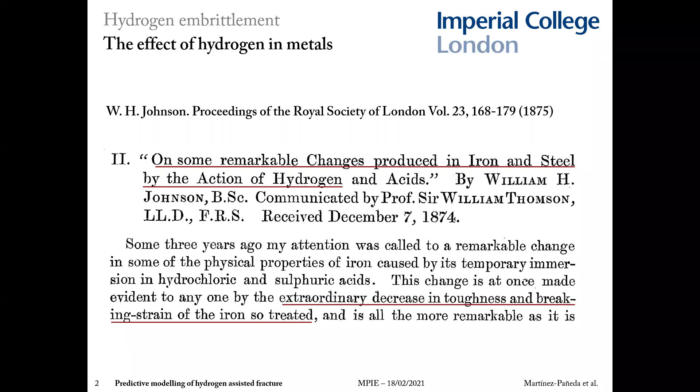So let's get started. First things first, what is this hydrogen embrittlement phenomenon and what is so special about hydrogen metal interactions? We know since more than 100 years ago that metals are very sensitive to the presence of hydrogen. Johnson wrote in 1875 in the Proceedings of the Royal Society about an extraordinary and remarkable decrease in fracture toughness and breaking strain in iron and steel in the presence of hydrogen. In those days, you would very rarely see words such as remarkable or extraordinary in scientific papers. But how hydrogen degrades metals is indeed remarkable and extraordinary.

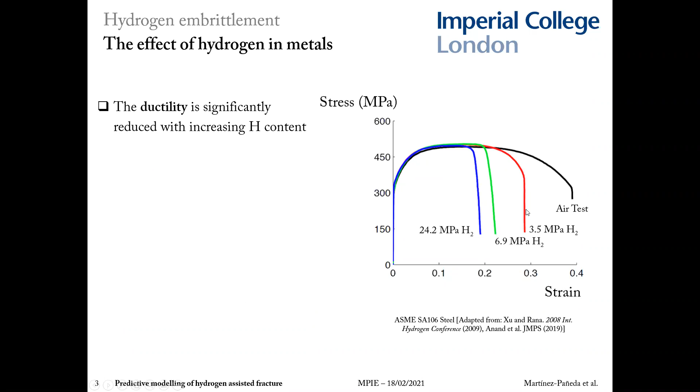One of these effects of hydrogen in metallic materials is how the ductility reduces significantly with increasing the amount of hydrogen. You can see here uniaxial stress strain curves. If we introduce hydrogen into our specimens, for example by exposing them to hydrogen gas, we see a very strong reduction in the failure strain.

This is a very important point to emphasize: the susceptibility to hydrogen damage increases with the strength of the steel. You can see here a plot of fracture toughness versus material strength. This is for a given hydrogen concentration, typical of exposure to seawater. High strength steels yield a fracture toughness that is below 10 megapascals per square root meter, almost like a ceramic.

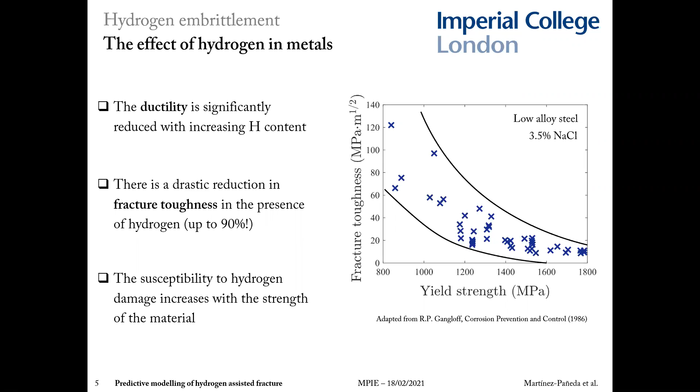This figure has two important implications. One is that hydrogen is effectively compromising decades of metallurgical research. We have developed high performance materials, but we cannot use them. The second is that high strength steels very significantly widen the range of environments where hydrogen is problematic. With these more susceptible modern materials, very little hydrogen content is sufficient to trigger failures in many applications and sectors where we never heard about before.

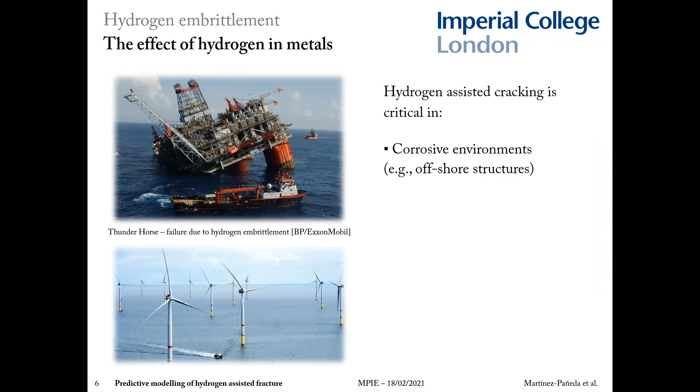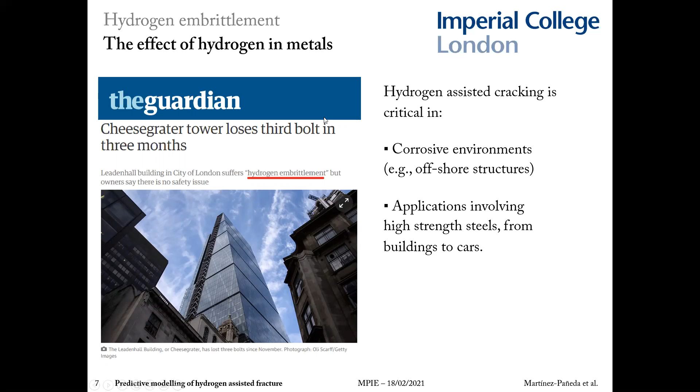Before high strength steels were developed, hydrogen embrittlement was mostly a problem related to aggressive environments, for example those typical of offshore structures in the energy industry. However, high strength steels are very cost effective and we want to use them for our buildings, bridges, railways, cars. This is triggering numerous hydrogen fracture problems across the defense, transport, and construction sectors, in otherwise benign environments. You can see an example in this newspaper article where hydrogen embrittlement is bringing structural integrity problems to one of the most famous skyscrapers in London.

Last but not least, hydrogen could be the solution, or one of the solutions, to our energy crisis. We already have hydrogen fueled cars, trains, and buses in the market. We have a number of these in London. And you can imagine how problematic it's going to be to store and transport hydrogen to power all those vehicles.

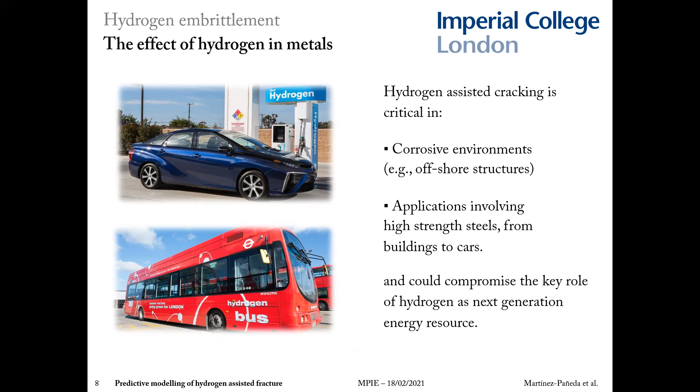Given the magnitude of the problem, you may wonder how it can be that almost 150 years after Johnson's paper in the Proceedings of the Royal Society, the problem is not only unsolved, but hydrogen-related accidents are becoming more and more frequent. One of the reasons is because it is a very challenging phenomenon that crosses the boundaries of mechanics, chemistry, and material science.

We do know some things, of course. We do know that hydrogen atoms enter the material, diffuse through the crystal lattice relatively fast, and are attracted to areas of high hydrostatic stress or high volumetric strains, where the lattice expands and there's more space for the hydrogen to accumulate. But then in that fracture process zone, hydrogen interacts with materials in many different ways and at multiple scales.

So the physical picture is quite complicated. For example, at the atomistic scale, hydrogen can reduce the bonding strength between metal atoms. Hydrogen can also stabilize vacancies. Hydrogen can change the dislocation mobility, and so on.

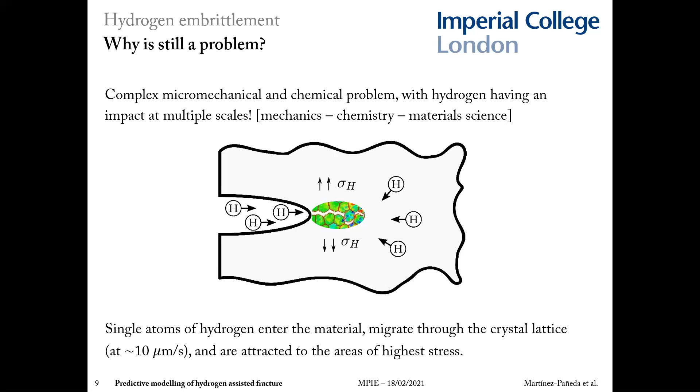This lack of scientific understanding comes at a great cost. Two recent examples are the failure of bolts in the San Francisco Bay Bridge, with a repairing cost of $45 million US, and the cracking of pipelines in the Kashagan oil field with a repairing cost of $3.6 billion US. So this is a massive amount of money.

I think that hydrogen embrittlement is a very beautiful problem because it is scientifically very challenging and very fundamental, but at the same time it has very strong and direct implications for society and engineering practice. As an engineer and a scientist, I find it very rewarding to work on these kinds of problems.

So I aim at tackling this long-standing challenge of developing a predictive model for hydrogen embrittlement, and I divided my efforts roughly into 4 research fronts.

First, it is important to precisely characterize the stresses ahead of the crack. This is relevant not only because brittle failure will occur at a critical stress, but because, as I mentioned before, hydrogen accumulates in areas of high hydrostatic stress.

The second research front involves gaining mechanistic understanding of what hydrogen is doing at the fracture process zone. This is another key step because hydrogen interacts with metals at many different scales and in many different ways. So we will never be able to model a wind turbine atom by atom.

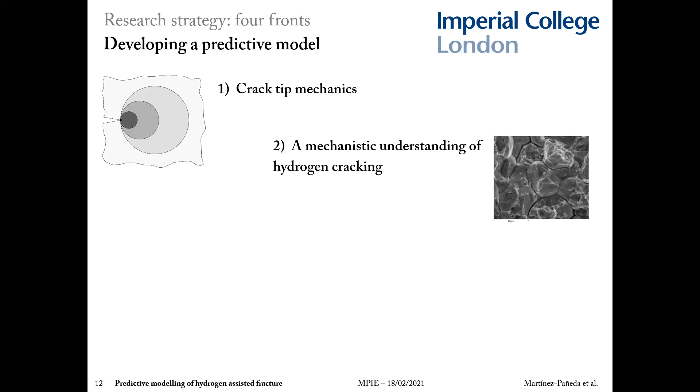And third, of course, we not only want to get the physics right, but we also want to get the chemistry right. We want to know precisely how much hydrogen we have, where, and when.

Last but not least, we want to couple all of those ingredients into a computationally robust framework that not only has the proper physics and chemistry, but also the capability to deliver predictions at scales relevant to engineering practice. I feel this is very important to address on the computational side as well, because I have the personal ambition of enabling virtual testing in the energy sector and in hydrogen-sensitive applications in general.

As you know, virtual testing saves a lot of money these days in the automotive and aerospace industries. They mostly crash cars in computers nowadays. Extending this vision to more challenging areas where the environment compromises the durability of materials requires not only a deeper material science understanding, but also the development of sophisticated computational schemes.

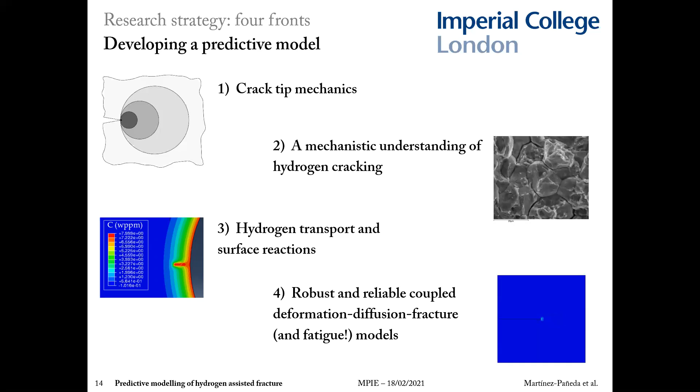So let me elaborate a bit on these 4 research fronts. I'll start first with this key aspect of the importance of resolving properly your crack tip stresses.

The key step here, or I guess in any research problem, is to identify what are the critical variables of your problem. In this case, hydrogen concentration and stresses, and also what is the critical length scale.

There's an obvious trade-off between computational cost and precision. We're still very far away from being able to use discrete dislocations or atomistic approaches to model real components.

But if all the interesting things are happening in the first 3 atoms ahead of your crack tip, then your efficient continuum model is not going to have enough resolution to resolve the physics of the problem. So I guess the question here is, what is the critical length scale for hydrogen embrittlement?

We can determine the critical distance at which cracking occurs by interpreting experiments. Hydrogen-assisted fracture is a little bit like fatigue, in that if you plot the crack velocity versus the applied stress intensity factor, you get this 3-stage region.

A first stage immediately after cracking, where the crack speed grows fast with applied load. A stage 2, where the crack speed is insensitive to the remote load. And finally, the rupture.

The reason why the crack speed is constant in stage 2 is because crack growth is diffusion limited. You have enough mechanical driving force, so to say, but you need to wait for the hydrogen atoms to reach the critical distance ahead of the crack. So cracking is intermittent here, the crack does small jumps as the hydrogen atoms reach the critical distance.

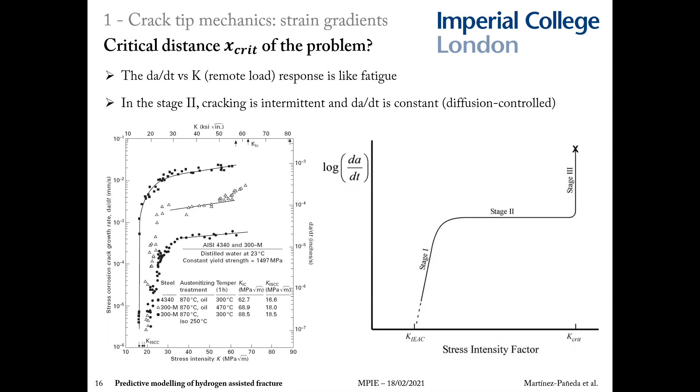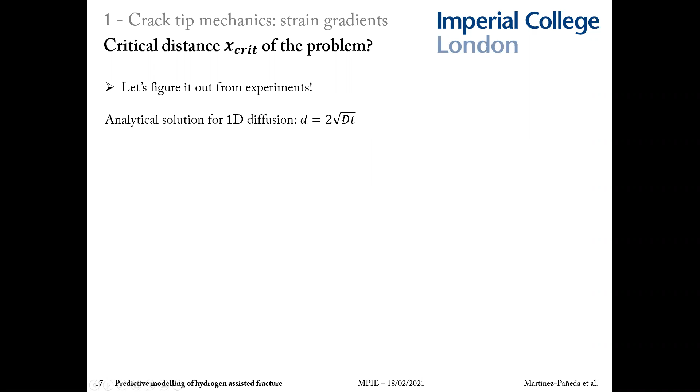Since we know how much time it takes for hydrogen to travel a certain distance, d, for a material with a diffusion coefficient capital D, then we can use experimental data to determine what this critical distance and this critical time is.

So for example, in the case of this nickel superalloy, we can see the stage 2 crack growth. The stage 2 crack growth speed in these three replicate experiments at a potential of minus 1,000 gives us a value of 0.04 microns per second.

Since we know the material diffusion coefficient, which we can measure independently, we can come up with a simple system of two equations: the crack speed and the 1D diffusion analogy. Solving this system, we find that the critical distance equals 1 micrometer. So the hydrogen atoms travel 1 micron ahead of the crack before reaching that critical region.

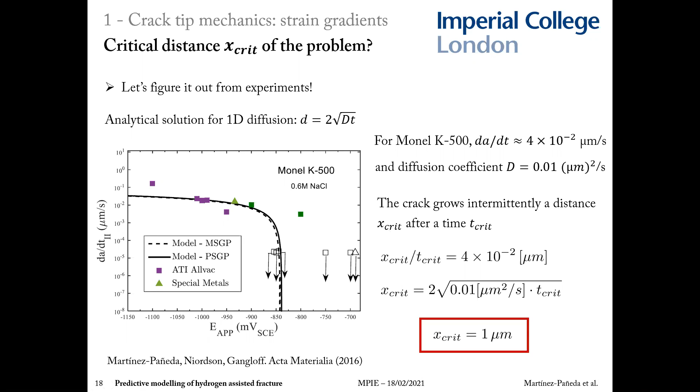So back to the drawing board. What methods do we use? At the microscale, ideally we need discrete dislocation dynamics. But since we want to impact engineering practice, we're constrained to use continuum models.

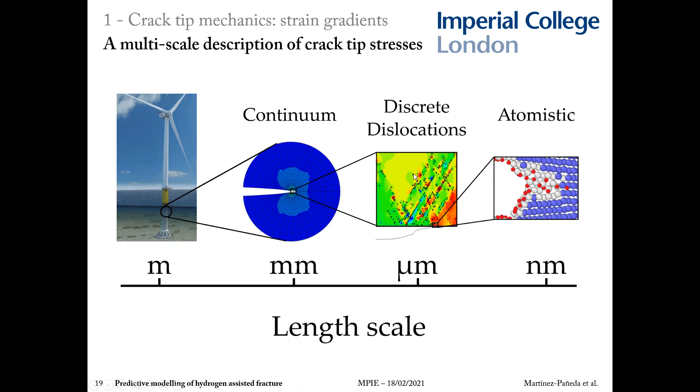So the alternative we've explored is to enrich our continuum models with the physical effects that are missing at the critical distance of the problem. That means we introduce the physics implicitly, by changing the constitutive equations. You can compare what your continuum model predicts a micron ahead of the crack tip with what discrete dislocations predict, and when you see the difference, you can enrich your continuum model.

The main effect you're missing out on at 1 micron ahead of the crack tip is the dislocation hardening mechanism associated with plastic strain gradients. This has been consistently observed in a number of microscale experiments, from indentation to bending, but the ones I like more are the torsion experiments by Fleck and co-workers.

What you see in the slides are experiments done on thin copper wires: torsion on the left and uniaxial tension on the right. You can see that in uniaxial tension, where strains are uniform, the response is roughly the same independent of the size of the wire.

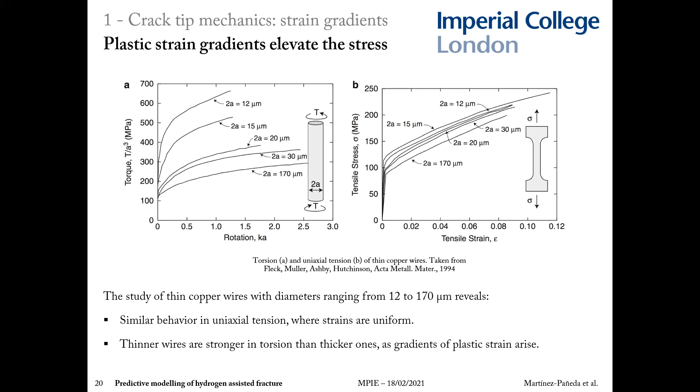The general idea in these formulations is that the plastic work, or the flow strength, is related not only to the plastic strains but also to the plastic strain gradients. In that way, a length scale comes naturally into the model due to dimensional consistency. One can quantitatively capture those dislocation hardening mechanisms that you see when you have large gradients of plastic strain confined into a small volume.

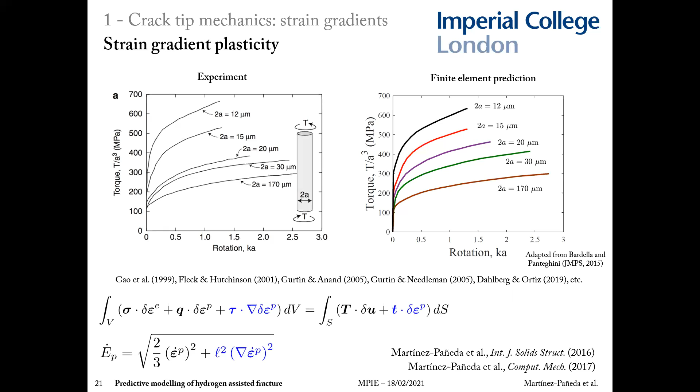But also I've been working mostly on applying these strain gradient theories to gain insight into crack tip mechanics. Because if you have a crack in a specimen, independent of the size of the specimen, you're going to have a plastic zone that is physically small and contains strong spatial gradients of deformation. So you're going to see those local hardening mechanisms that we saw before, the same way you see them in indentation. And today you can measure very precisely GND densities ahead of cracks and inclusions.

What you see when you model crack tip fields with strain gradient plasticity is what's in the slide. Here I'm plotting the tensile stress versus the distance ahead of the crack tip. You can see that far away from the crack tip, both conventional plasticity and strain gradient plasticity agree.

But as you approach the crack tip within tens of microns, strain gradient effects start to play a role, and you get a stress elevation as a consequence of those local hardening and strengthening mechanisms. The differences are quite significant if you look at 1 micron ahead of the crack tip, which is the critical distance for hydrogen embrittlement.

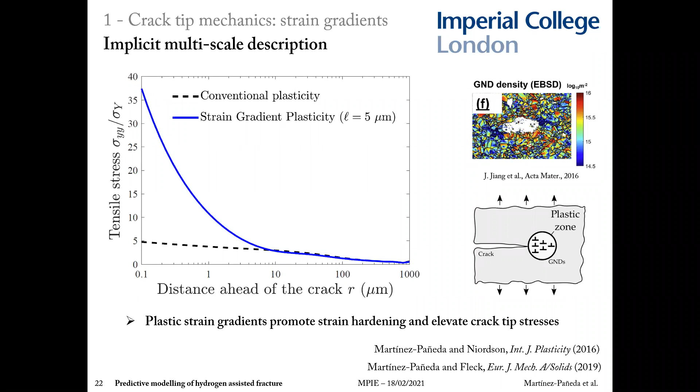Let me remind you that getting these stress levels right is very important, not only because of cohesion or brittle fracture arguments, but also because the higher your hydrostatic stresses are, the more hydrogen will accumulate at that critical distance. In passing, this is what you see when you use discrete dislocation dynamics. This is from Bill Curtin's group, and you can see that fracture is attained at critical cohesive strengths up to 9 times larger than the yield stress.

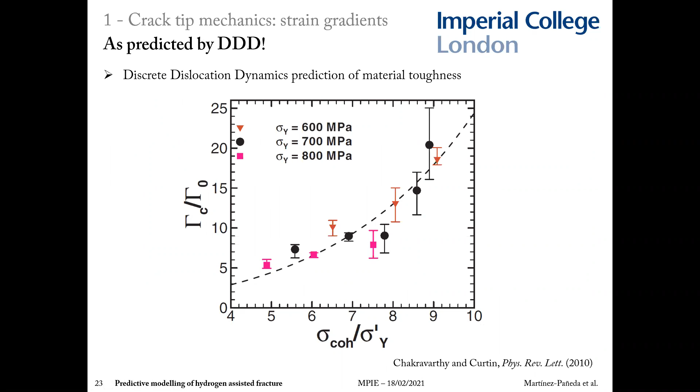This is much higher than the maximum stress levels predicted with conventional plasticity models. This stress elevation has allowed us to not only bring insight to the hydrogen embrittlement problem, but also to rationalize many brittle processes that occur in the presence of plasticity, because the theoretical lattice strength or cleavage strength is on the order of 10 times the yield stress. So you need higher stresses coming from somewhere to rationalize these brittle processes mechanistically.

For example, we had a lot of fun with this approach, looking at fracture of bi-material interfaces, where you can also model dislocation pileup, and also developing statistical frameworks for low temperature cleavage of ferritic materials.

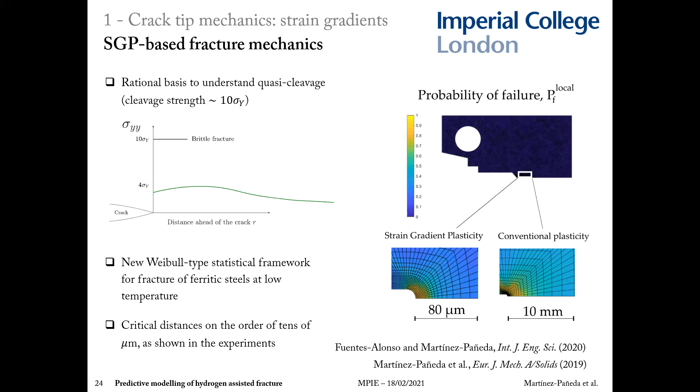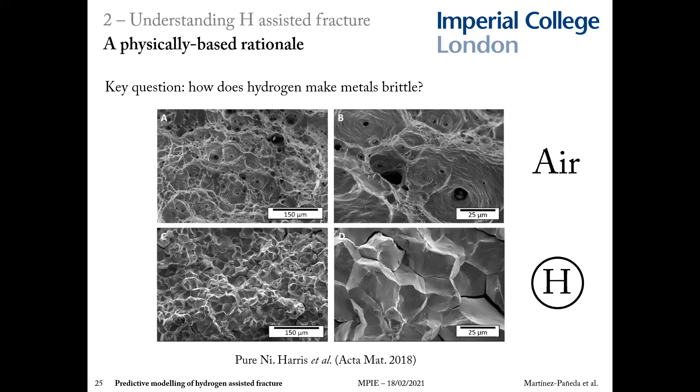But let's go back to the hydrogen problem. This takes me to the second research front, which involves gaining mechanistic understanding into the process. The key question is to understand how hydrogen makes metals fail in a brittle manner, often with the crack propagating along grain boundaries, as you see in that slide. For this purpose, I tried to determine the first order effects behind the ductile to brittle shift we see in the presence of hydrogen. I came to the conclusion that three ingredients are key to developing a mechanistic rationale.

The first is that atomistic calculations show that the bonding strength between metal atoms is reduced with hydrogen occupancy. You can see here a DFT result of surface or fracture energy versus hydrogen occupancy. This is for nickel, and you can see that if we have enough hydrogen, on this side of the graph, the cleavage strength or grain boundary strength will be much weaker.

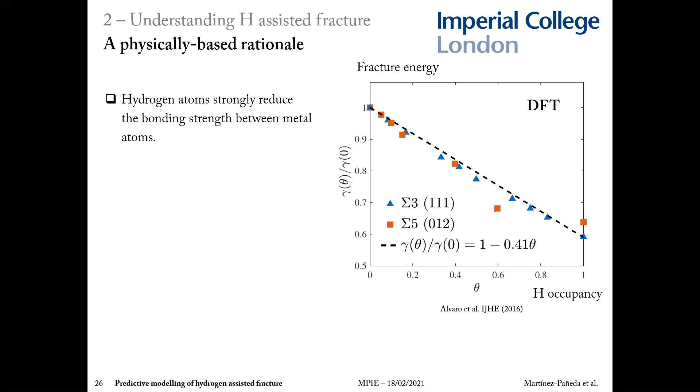There has been a bit of discussion in the atomistic community regarding quantifying how strong this effect is, and a big part of the controversy relates to figuring out how much hydrogen you actually have. So where are you on this x-axis, this hydrogen occupancy? That is the next research question. So where are we on this hydrogen occupancy axis? How full of hydrogen, for example, are our grain boundaries?

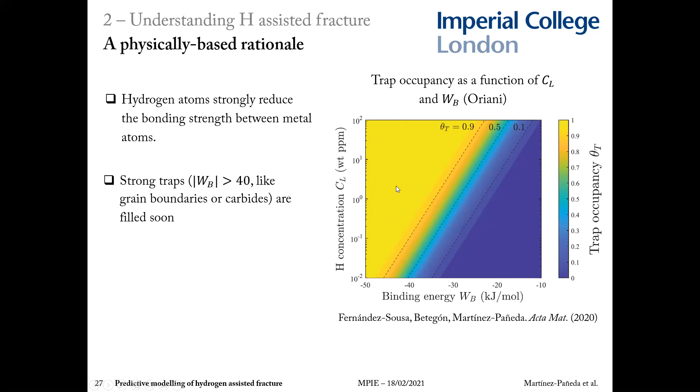The answer comes from well-established mass diffusion laws, specifically Oriani's equilibrium. You can relate the hydrogen concentration in the crystal lattice, the y-axis here, with the occupancy of a trap, theta t, as a function of the binding energy of the trap. What we learn is that strong traps, such as grain boundaries, with an absolute binding energy of 40 kilojoules per mole or higher, will be essentially full for hydrogen concentrations as low as 0.3 ppm. So if you look at this graph, as long as you reach any meaningful value of the lattice hydrogen concentration, you get full occupancy of the trap, or almost full occupancy. This is what you see in experiments.

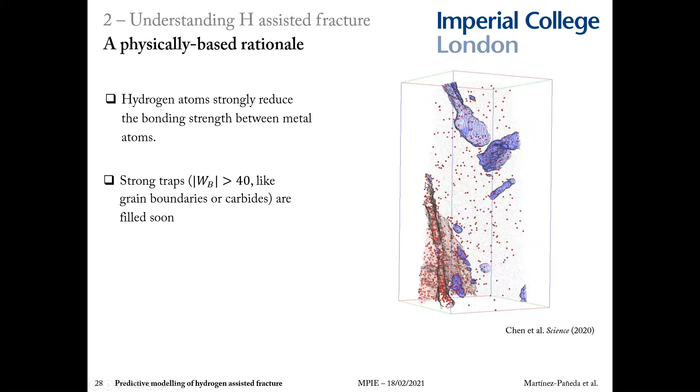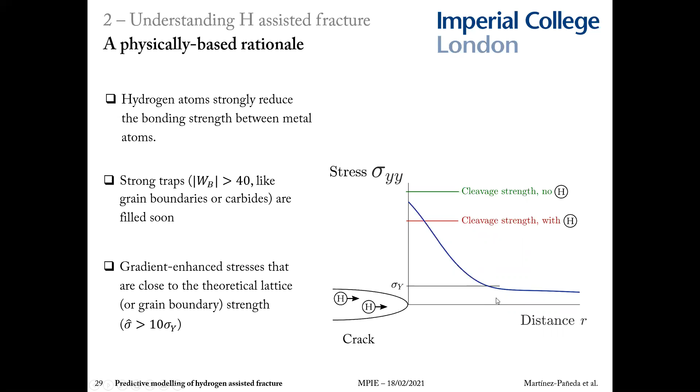When you properly consider the stress level near the crack tip, you see that the drop in cleavage strength is sufficient to trigger brittle fracture. In other words, when you combine the fact that hydrogen will drop the cleavage strength by, say, 20%, with the fact that your stresses at the critical distance are close to the cleavage strength, maybe 10 times the yield stress as we saw in the DDD simulations, you end up with a mechanistic model that can predict the ductile to brittle shift as a natural byproduct of the simulation, without any ad hoc criteria or fitting parameters. You don't have stresses or energy big enough to hit the cleavage strength, but the moment hydrogen comes into the picture, you are able to naturally predict that. I will show this later.

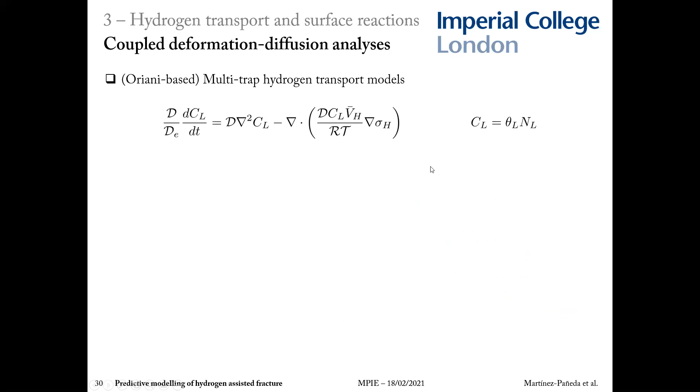So let me jump to the third research front, the chemistry. Hydrogen diffusion is normally characterized using an extended version of Fick's law, as you see in the slide. Note the important role of the hydrostatic stress, as I mentioned before, so there's a strong coupling with the mechanics. One thing we have been working on is the development of multi-trap models, as hydrogen atoms can be trapped at microstructural features such as grain boundaries, dislocations, and carbides, and this affects diffusion. So it's something you may want to incorporate in your modeling depending on what you're looking at.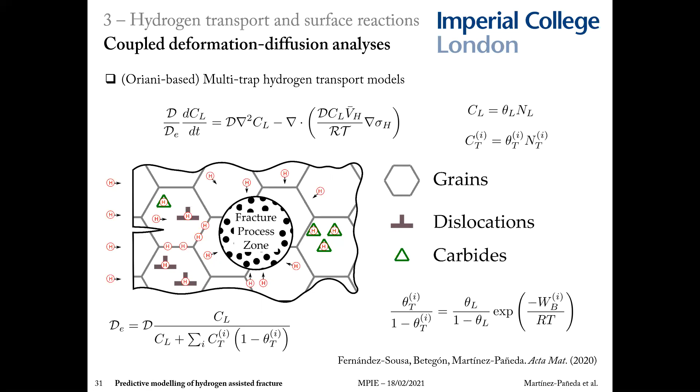Another important aspect that has to be addressed to properly quantify hydrogen is to adequately characterize hydrogen ingress into the metal. This is not complicated for gaseous environments—one can just make use of Sievert's law—but in aqueous environments, the physical picture is more complicated.

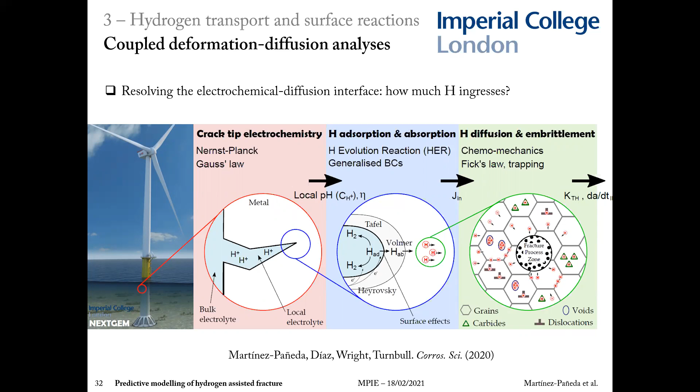What I've been working on with Alan Turnbull is developing generalized boundary conditions that can resolve the electrochemistry-diffusion interface. I won't elaborate much more for the sake of time, but what I can say is that using these rigorous formulations, we learned that the usual procedure of prescribing a constant hydrogen concentration can be very inaccurate. So it's worth taking that into consideration.

I think this is a key aspect of the modeling that sometimes has been overlooked, maybe because we are more familiar with the mechanics side of it rather than the electrochemistry. But we need to take into account that almost every chemomechanical fracture model for hydrogen out there is very sensitive to hydrogen ingress—the input to the model, which is the hydrogen concentration. So we need to be able to properly figure out how much hydrogen is actually coming in.

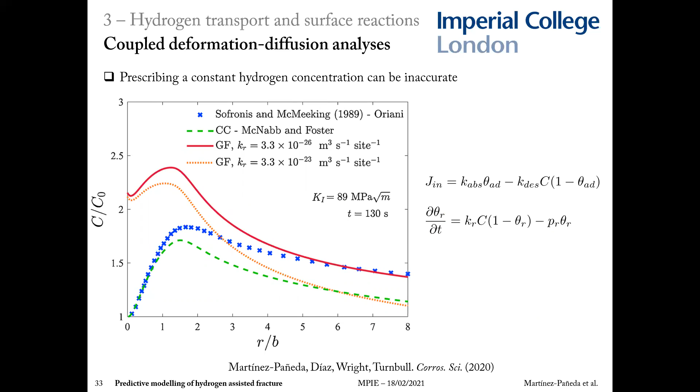One more thing on the diffusion side before I move to the fracture process: remember that mechanics plays a key role. There's a hydrostatic stress term here, and in fact, for the steady state case, this is the closed form solution for the lattice hydrogen concentration. You can see there's an exponential dependence on the hydrostatic stress, which is why it's so important to enrich continuum models to be able to accurately quantify crack tip stresses.

As you can see in the slide, experimental measurements of hydrogen concentration ahead of the crack tip agree better with predictions from strain gradient plasticity and show two effects. First, hydrogen content increases with the remote load, which is only captured with strain gradient plasticity. Second, hydrogen content increases as we approach the crack tip, which again you can only capture if you enrich your continuum model.

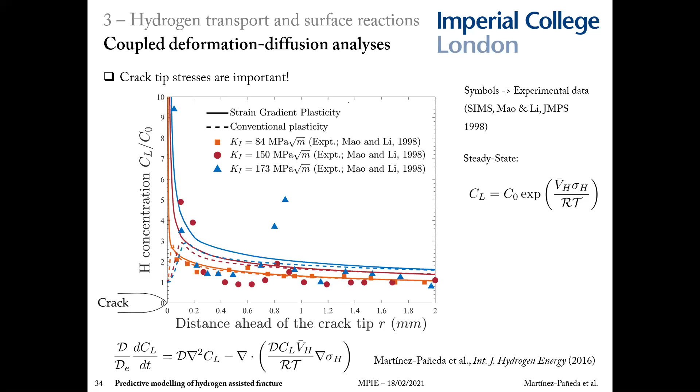That takes me to the fourth and last research front, which has to do with the development of compelling multiphysics computational tools. Myself, I have used a variety of computational fracture mechanics approaches in the past, like XFEM or cohesive zone models.

But not so long ago, I came across the phase field fracture method, and I cannot speak more highly about it. The idea of these phase field methods is to use an auxiliary variable to track the evolution of interface boundaries, which is a well-known mathematical and computational challenge.

With the phase field paradigm, we follow the interfaces implicitly, in the sense that we no longer have a sharp interface, but the auxiliary variable, the so-called phase field or phase field order parameter, tells us where the interface lies. The method was first developed in the microstructural evolution community, where the change in shape and size of microstructural features, such as grains, can be predicted by defining the evolution of the phase field in terms of other fields, such as temperature, through a thermodynamic free energy.

In fracture mechanics, the phase field tracks the crack-solid interface, taking, for example, a value of 1 in the crack phase and 0 in the undamaged material points, varying smoothly in between. The temporal evolution of the phase field is then described by a differential equation that can be easily solved using standard numerical methods, making the tracking of evolving interfaces computationally tractable.

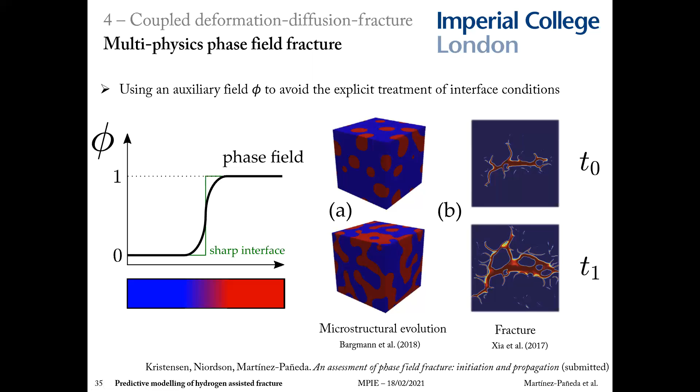You can see in the slide how complex cracking morphologies can be captured, such as crack merging, nucleation from arbitrary sites, and branching. So it's a very powerful tool from a computational perspective.

At this point, you might say, okay, all good on the computational side, no issues dealing with evolving interfaces such as cracks. But when do those cracks propagate? In other words, what differential equation do you use to evolve the phase field? Well, one of the nice things about phase field models is that they provide a computational framework for Griffith's energy balance.

Those of you familiar with fracture mechanics will remember that Griffith, one of the fathers of the field, postulated that a crack will grow if the energy released by the solid reaches a critical value, the so-called critical energy release rate or material toughness. This energy balance results from considering, in a thermodynamics context, the work required to create two surfaces.

One can formulate Griffith's energy balance in a variational form with a term accounting for the stored elastic energy in the solid, as given by the strain state, and a second term characterizing the fracture energy, the energy dissipated by the formation of a crack.

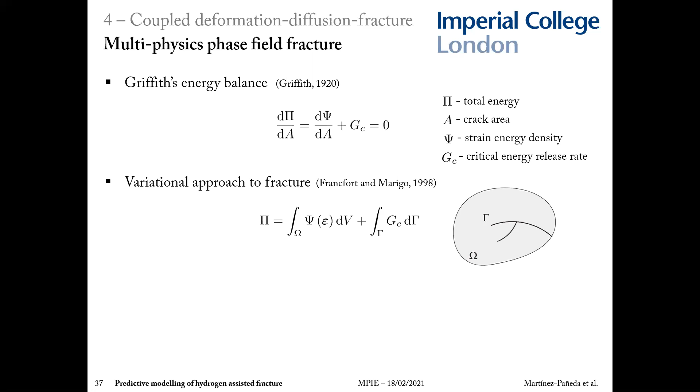Therefore, crack nucleation and growth can be predicted naturally without ad hoc criteria, as dictated by the minimization of this energy conservation statement. However, minimization of this Griffith functional is hindered by the fact that the crack surface gamma is unknown. But here is where phase field comes to our rescue, because one can use the phase field as a marker, transforming the surface integral into a volume integral and enabling us to solve this global minimality problem.

There are two things I want to emphasize here. First, following standard continuum damage mechanics arguments, the phase field can be thought of as a damage variable that goes from 0 to 1 - 0 in intact material, 1 in fully cracked material points. As a consequence, increasing this value reduces the stiffness of the solid, as you can see here in the first integral.

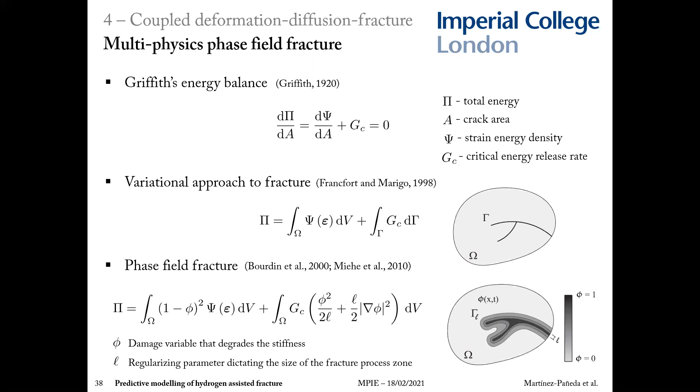Secondly, there is a gradient term and consequently a length scale, so the model is non-local, which ensures mesh objectivity. Results are mesh independent as long as you resolve this phase field length scale. So at the end of the day, we have a model that is physically sound, based on Griffith and the thermodynamics of fracture, and at the same time computationally very compelling.

You can get a good overview of the model by looking at the balance equations. The first equation is the solution to the deformation problem, the standard balance of linear momentum, with the phase field degrading the stiffness of the solid, which increases with mechanical straining.

The second equation is the phase field evolution, a competition between the toughness of the material, a constant material property, and the strain energy density, the energy stored in the solid. Just by solving this simple system, we can predict in both 2D and 3D very complex cracking patterns, such as branching, merging, initiation from arbitrary sites, complex trajectories, and without convergence issues or the need for remeshing.

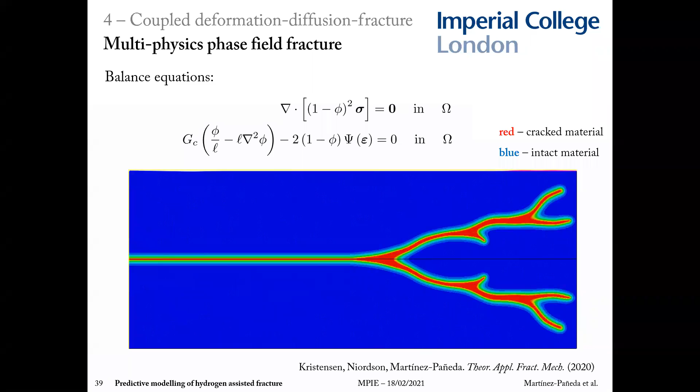We have had quite a lot of fun with it and contributed to the phase field scientific community by presenting new solution schemes and by using new phase field formulations for fracture and fatigue, and developing new phase field formulations for fracture and fatigue in functionally graded materials, in shape memory alloys, and also in fiber reinforced composites.

It has been a great experience, to be honest, working with this method. Results are mesh independent, the method is easy to implement, and there are no convergence problems.

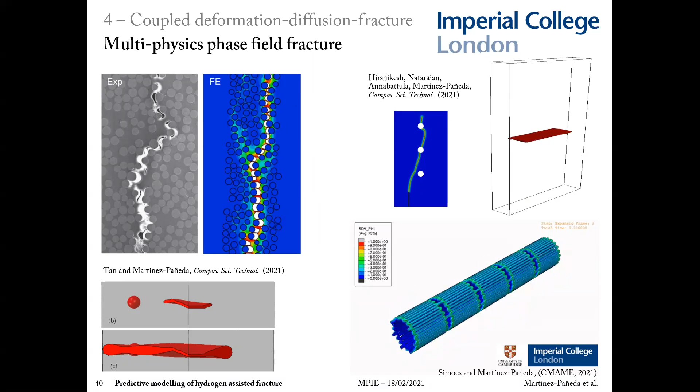So how does hydrogen come into the picture? Well, let me remind you of the three balance equations. There's one for the displacement field, with the phase field degrading the stiffness of the solid like a damage variable.

There's one phase field evolution law, which is a competition between the strain energy density of the solid, which changes with the strain state, and the fracture energy. So whenever you have enough energy stored in your solid, your crack will grow - that's consistent with thermodynamics. And then you have a hydrogen transport equation with hydrostatic stresses driving diffusion.

So how do we couple the fracture and the hydrogen parts in this problem? Well, the big picture is very simple. What we know from experiments is that hydrogen reduces the toughness, so we just need to make our critical fracture energy, or material toughness, depend on the hydrogen content.

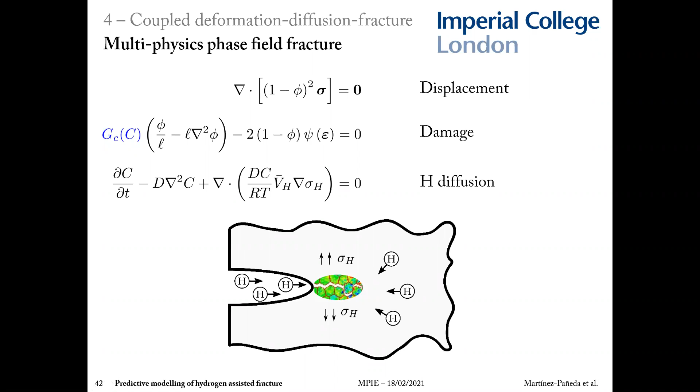How exactly does hydrogen degrade the material toughness? Well, that's the big question, I guess, and of course each of us might have a different answer. The good news is that the model is universal in that it can accommodate any mechanistic interpretation.

The key idea is that you have a material toughness that, in the absence of hydrogen, we know very well - we can characterize it with a fracture experiment. And then in a hydrogen-containing environment, you can introduce what we call a degradation function, here called F, that can be dependent on any mechanistic parameter that you consider relevant.

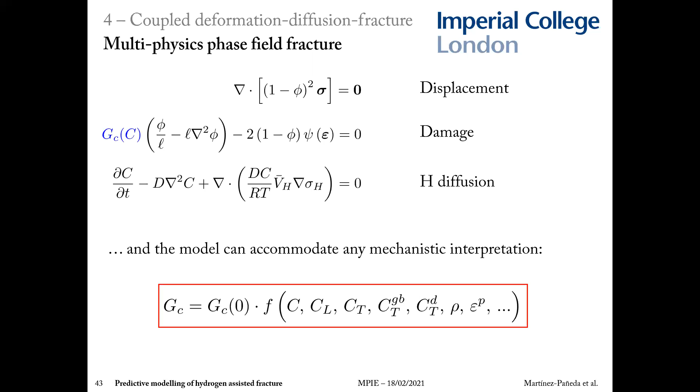It could be the lattice hydrogen concentration, it could be the total hydrogen concentration, it could be the hydrogen trapped in grain boundaries, it could be the dislocation density, any macroscopic or microscopic parameter that you think is involved in the fracture process. And of course, one can also come up with empirical laws by fitting experiments.

In our case, we want to follow the rationale that I outlined before. So we establish a direct quantitative connection with the atomistic calculations that I discussed before, which tells us how the surface or the fracture energy is reduced with hydrogen coverage.

So we can run atomistic calculations offline and use them to define a degradation law that has no fitting parameters. For example, in nickel, based on these DFT calculations, you can define a linear degradation law where this variable chi is the hydrogen damage coefficient, which equals 0.41. So there's nothing really to fit there.

The hydrogen diffusion will tell you how big the theta is, and then you get automatically the variation of the fracture toughness. This is a similar approach to the one championed by Michael Ortiz in cohesive elements. And in phase field models, there's a direct connection between the phase field length scale and the strength and the toughness. You can see it here.

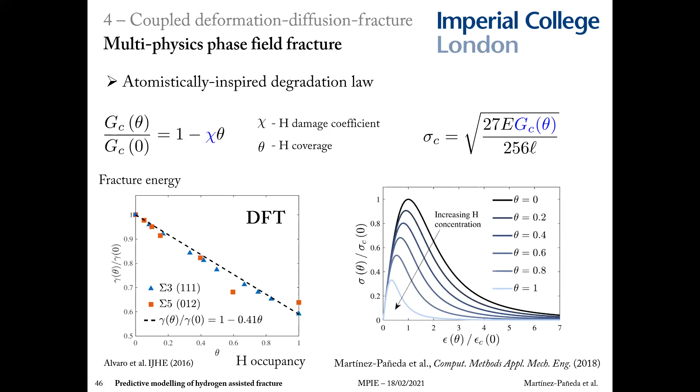So that if you run a one element model, you get the following stress strain curve, which resembles a cohesive zone traction separation law. So that if you consider the role of the hydrogen, then what you can see is how the strength diminishes as you increase the hydrogen concentration. So that's what you get there.

And one last comment on the coupling between the phase field and hydrogen. One thing that you should consider if you want to capture precisely the crack propagation stage is the fact that the environment, the hydrogen gas or the aqueous electrolyte, will probably occupy the newly created crack surface. So you need moving boundary conditions for the diffusion problem.

You can see in this video that in the context of phase field fracture, one can use a penalty approach to readily capture how the hydrogen concentration of the environment basically follows the crack as the crack propagates.

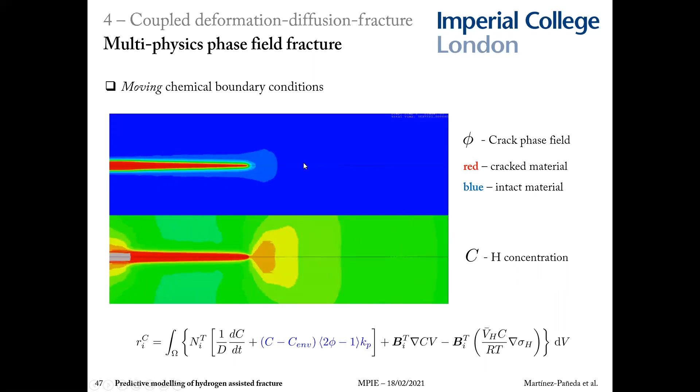So now let me show you some representative results obtained after coupling all the ingredients. So we have the microscale plasticity model, we have the mechanistic interpretation based on offline atomistic calculations, we have a rigorous treatment of the diffusion and the diffusion boundary conditions, and then we also have the phase field fracture to deal with complex cracking phenomena.

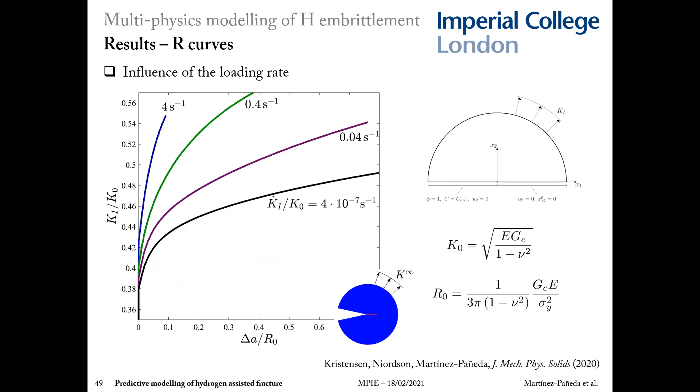What you see in this slide are the results obtained for different loading rates, showing how the model captures another well-established experimental observation: the faster the loading rate, the higher the crack growth resistance.

And as a consequence, the ratio of the plastic length scale, which is a fixed material property that you can fit to a microscale experiment, and is roughly on the order of 5 microns, that ratio is going to increase because this is a constant property, and then the fracture process zone, the region over which you have the gradients, is going to be smaller.

And this is something that is also expected. We know that gradient effects are smaller in ductile fracture processes, where the critical distance is farther away from the crack tip, and the fracture process zone is large.

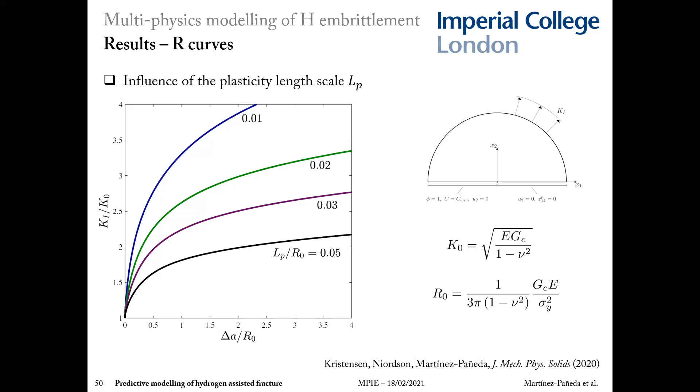And here you can see how the crack growth resistance changes with the material strength. And this is important to showcase how our model can naturally capture the shift from ductile to brittle fracture once hydrogen comes into the picture.

Because for each value of the strength, you can compute a steady state fracture toughness where the R curve becomes flat, so this region here. And we know that brittle interfaces such as grain boundaries have a strength on the order of the theoretical lattice strength, so 10 times larger than the yield stress approximately.

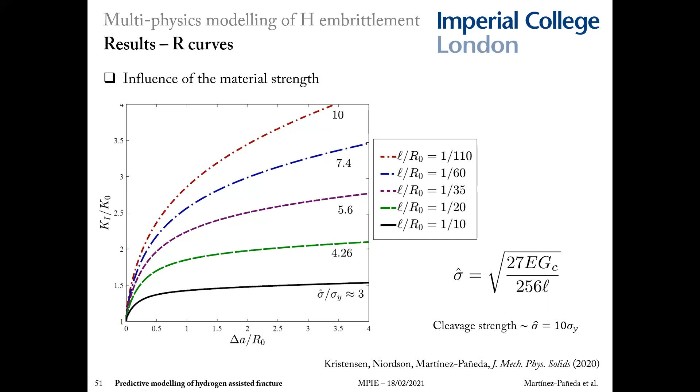So we can plot the steady state fracture toughness as a function of the cohesive strength, and then we get two curves depending on whether we have hydrogen or not. In the absence of hydrogen, the role of plastic strain gradients is small, and consequently the stress elevation is roughly 4 times larger than the yield stress, much below the cleavage strength.

So brittle interfaces will not fail, so you have a ductile fracture process. However, when hydrogen comes into the picture, it reduces the toughness, and consequently the fracture process zone, leading to the red curve shown in the figure. You can see that this is enough to predict the brittle fracture of interfaces once you take into consideration the small reduction in strength that you get with hydrogen content, as we see in the atomistic calculations.

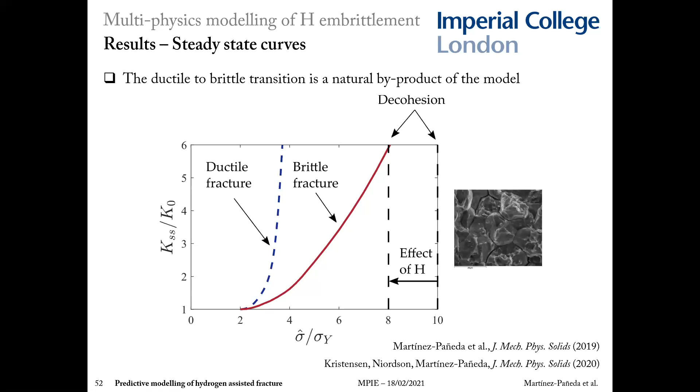You can find more details of this rationale in the papers, but the key thing I want to emphasize is that the model can naturally capture the change from a ductile fracture prediction to a brittle one once hydrogen reaches the fracture process zone. In other words, the combination of strain gradient plasticity, interface strength degradation due to hydrogen, and a fracture process zone model provides a modern rationale for the so-called hydrogen enhanced decohesion mechanism, in my opinion.

Here you see a set of interesting experiments where notched duplex stainless steel samples were held at a constant load in a seawater bath. Each sample is subjected to a different constant load, and all of them fail at a relatively early time from an engineering perspective. But what we can do with our model is not only reproduce the experiments, but run simulations over very large timescales so that we can determine the critical stress below which engineers can load their structure safely.

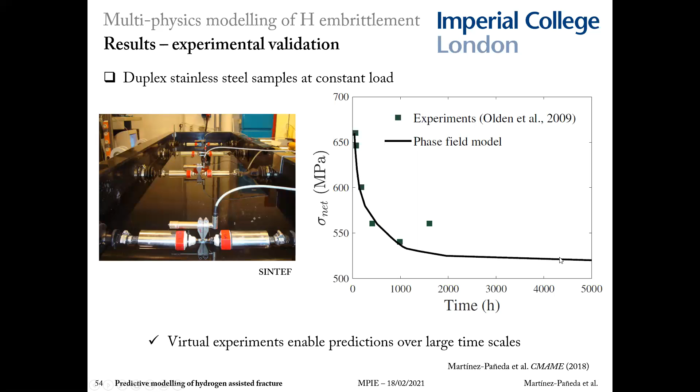We have also used this virtual tool to gain insight into the suitability of standardized tests, specifically regarding slow strain rate tensile testing. We learn, as our experimentalist colleagues at the University of Virginia suspected, that early cracking occurs, and this compromises the suitability of what is arguably the most widely used experiment for measuring hydrogen susceptibility.

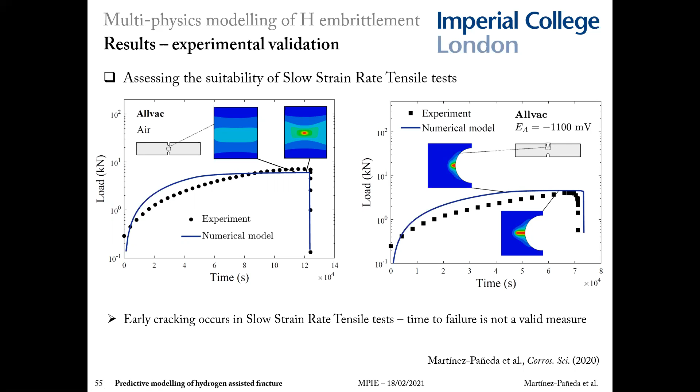One can also use this tool to simulate any kind of experiment, minimizing expensive experimental campaigns. For example, bolt cracking is a big problem in hydrogen embrittlement. Here you can see an experiment to measure the strength of a steel screw anchored in a concrete slab. This is a problem that involves also contact between two materials, as you can see here.

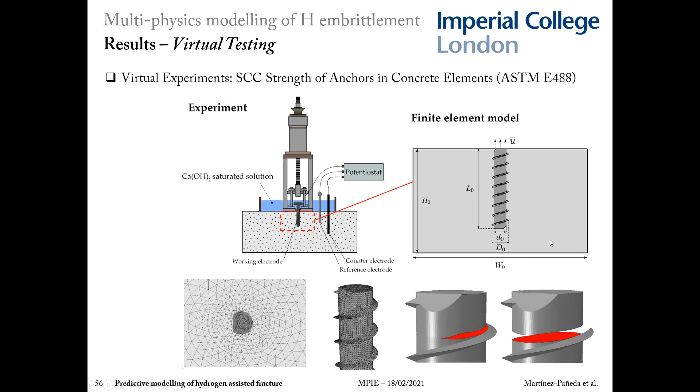The complete failure of the screw, as you can see in the slide, can be captured in our virtual experiment. So one can really precisely and effectively run those virtual experiments. And these agreements with experiments gave us the confidence to go beyond the lab into field applications, aiming at enabling the virtual testing paradigm that I mentioned before for hydrogen sensitive applications.

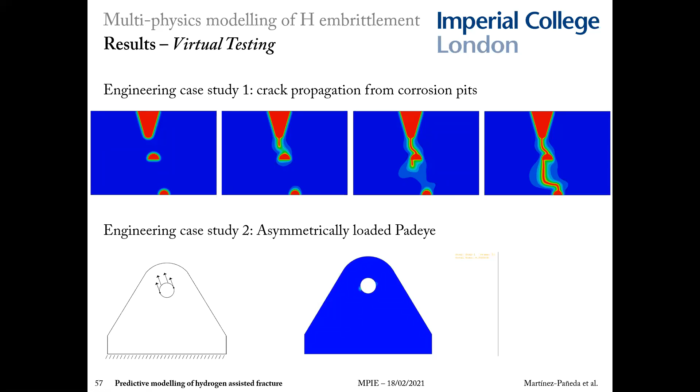And these are a couple of toy examples. The first one deals with a crack propagating from existing pits due to corrosion. The second example simulates crack propagation in lifting equipment made of a high-strength steel.

A key point to emphasize is that we're not limited to modeling cracks, but we can also model defects of any arbitrary geometry. Once you know that in these phase field models, because you are solving for the damage variable as a degree of freedom, it is very easy to introduce those defects. You just need to assign an initial condition to the nodes located in the damage area, and then you can load at the in-service conditions to predict when failure will happen.

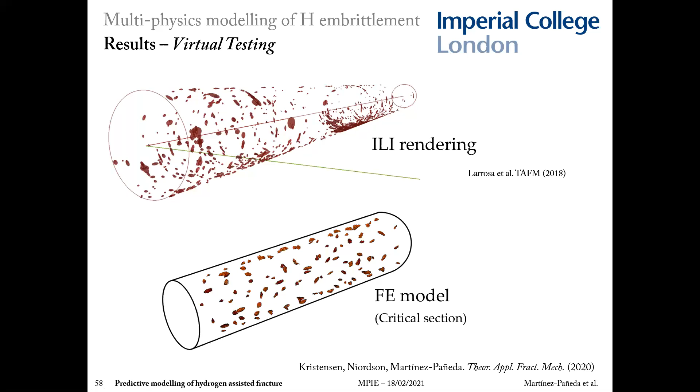So you can use the same mesh for all pipelines, no matter how many defects there are. This is shown here, how the pipeline starts being loaded. You can see soon at the top here how defects start growing, how they eventually merge, and finally how they lead to the complete structural failure of the pipeline.

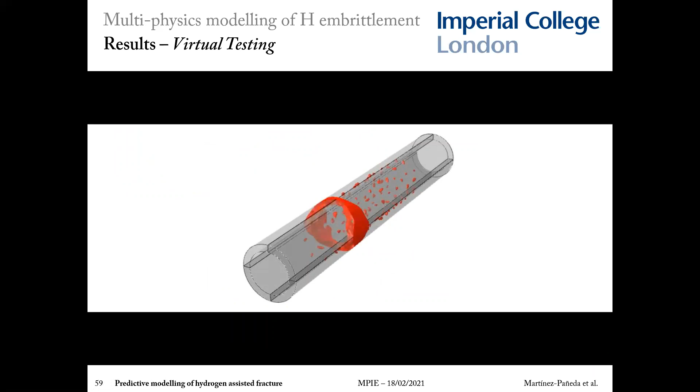And this looks a little bit like a video game, but I should emphasize that it's a sophisticated multiphysics model. Everything is computed on the original finite element mesh in an implicit backward Euler scheme without any convergence issues, and fully parallelized such that it can run in a few hours.

So we have a tool that allows us to know how cracks will propagate and when they will propagate, such that we can decide when to replace the component or what are the limit service conditions.

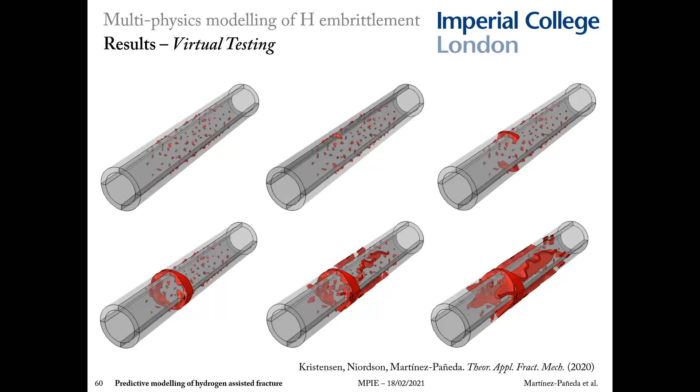And I emphasize here that the Paris law behavior and the SN curves are an output of the calculation, they are predictions basically, not an input, because this is quite different from other existing models.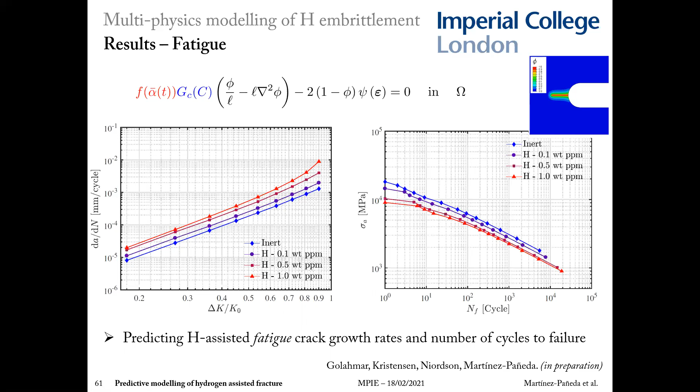And I'm going to end this talk just by showing very briefly another exciting avenue of research, which is the use of phase field modeling to capture how the surface of a corroding metal evolves.

So localized corrosion is generally a problem of great interest to our community, to the hydrogen embrittlement community, among other reasons, because hydrogen can be produced in corrosive environments.

However, predicting corrosion damage is a massive challenge for scientists and engineers. In fact, as you may know, the vast majority of the research conducted in this area is experimental, as it has been long considered too complex a problem to model computationally.

So capturing how this aqueous electrolyte solid metal interface changes in time is one of the biggest drawbacks that has held back our computational capabilities in this problem.

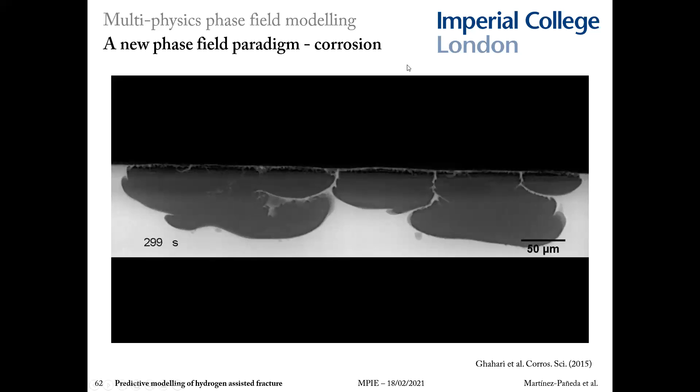But this bottleneck can be tackled if we exploit the phase field paradigm and implicitly track the evolution of this electrolyte metal interface. The differential equation that you solve for the evolution of the phase field is more based on models for phase field solidification rather than the fracture models that we discussed so far.

But I won't get into the details for the sake of time. You can find them in a recent paper. I will only say that we have also incorporated into the modeling the influence of mechanics in corrosion kinetics, and also the film repassivation and rupture process.

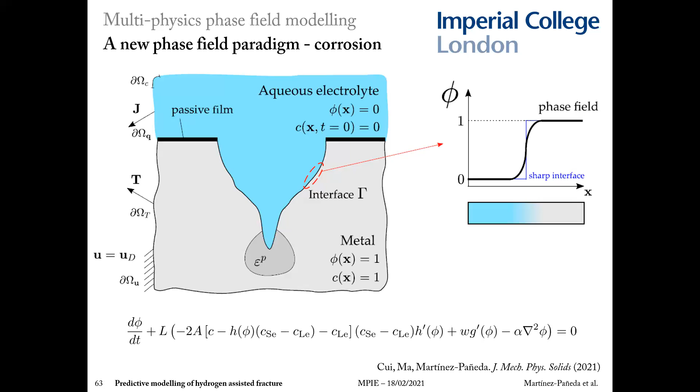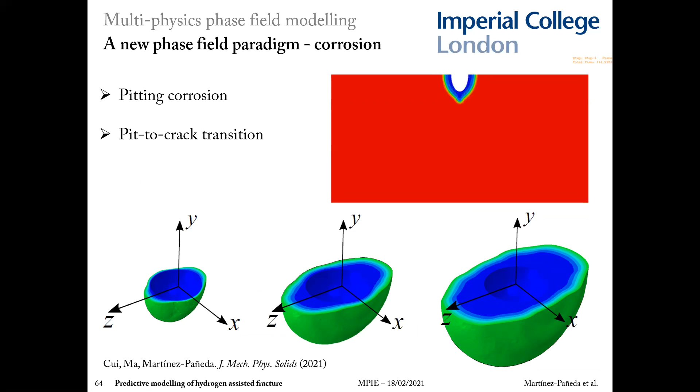And these are just some representative examples to show how the model can capture pitting corrosion and the pit to crack transition in both 2D and 3D. And we have validated our model predictions with experiments showing a very good agreement.

So let me just finish by providing some concluding remarks. I would just say that developing models for predicting hydrogen embrittlement is indeed challenging, but I think that this elusive goal can be tackled if one considers first enriched continuum models such as strain gradient plasticity that can calculate precisely crack tip stresses at a few microns ahead of the crack tip, which is the critical distance for hydrogen-assisted fracture.

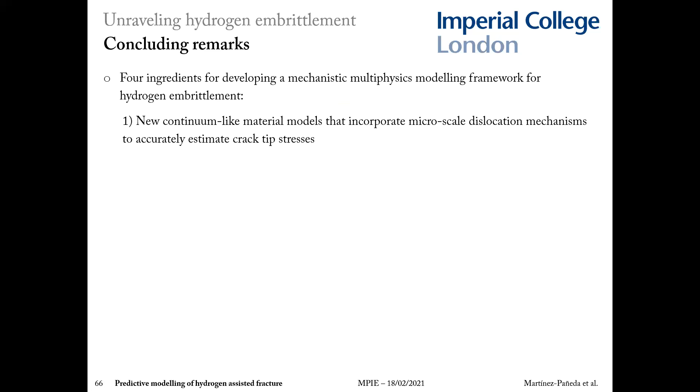Secondly, a mechanistic line of thought to rationalize the ductile to brittle transition is needed. And we came up with one by coupling microplasticity with atomistic calculations and well-established laws of hydrogen transport and equilibrium.

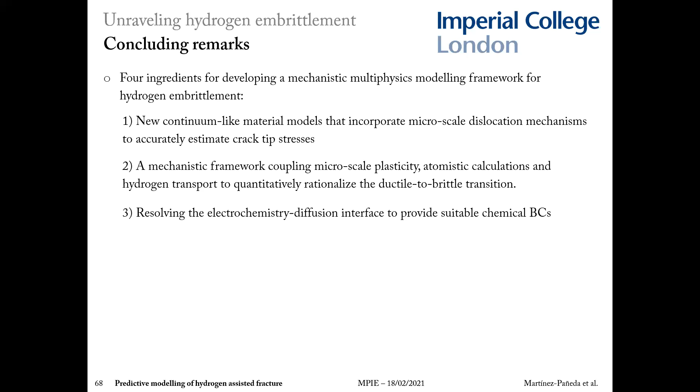And finally, or thirdly, by appropriately estimating the hydrogen content, using rigorous models for hydrogen transport and interface reactions. And the fourth ingredient is developing compelling multiphysics computational tools that will allow you to deliver predictions that can be benchmarked against experiments and inspections, for which we use the phase field fracture method.

And the good news is that once you put all those ingredients together, things seem to be working nicely. And you have seen that we have been able to get a good agreement with experiments, that we've also been able to predict fracture and fatigue, not only in lab conditions, but also in complex engineering applications.

And finally, we have shown that the phase field paradigm can also be exploited to model another long-standing challenge, which has also important technological implications, which is corrosion damage. And I think that we will see a revolution in this area similar to the one that we're seeing in fracture mechanics.